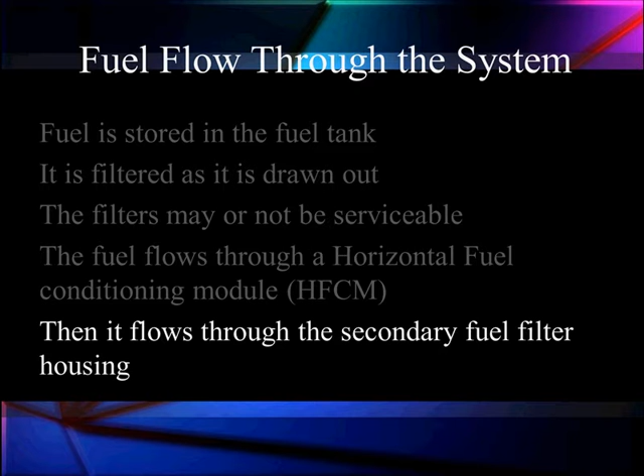It's going to pick up at the tank where the fuel is stored. Now the filters in the tank may or may not be serviceable depending on which version and vintage you have. Flow from there through the horizontal fuel conditioning module, which is going to give us our water separation and our first major filtering. Then it flows onto the secondary fuel filter housing. We're going to regulate the pressure, and then on to the injectors. So this is how we're going to get our low pressure fuel to the injectors.

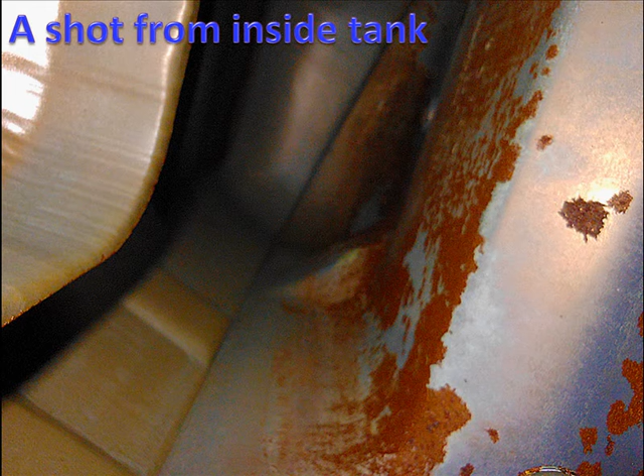Let's walk through some of the details. Well, first of all, these are vehicles that go hundreds of thousands of miles, so they get to have significant age on them. And sometimes we have rust like you have in the tank here. Sometimes it can be caused by using the wrong additives that attack the metals.

The fuel pressure has been changed on a lot of these vehicles. Early on it was 45 to 55 psi, but a lot of our technicians report they want to see the improved fuel pressure released by a new fuel pressure regulator spring, which will raise it to 60, and some say 70 psi. They like this because it gives them more reliable fuel delivery. We'll talk more about that in detail.

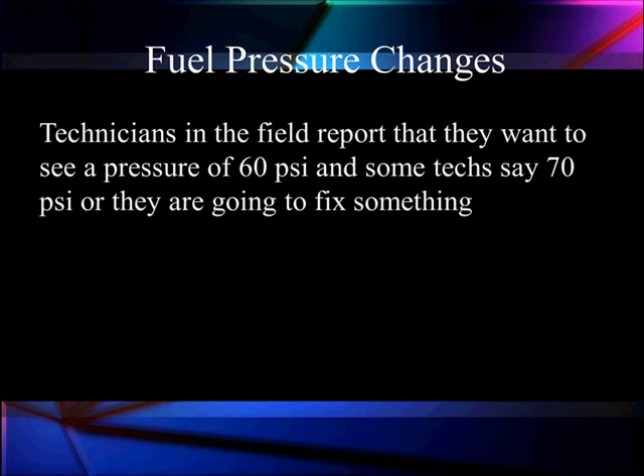Ford has released an updated fuel pressure kit with a blue spring. We'll see more about that in a little while. But I want to tell you, don't be confused if you hear people say they want to see 60 psi fuel pressure. Other people say they're willing to see anything over 45.

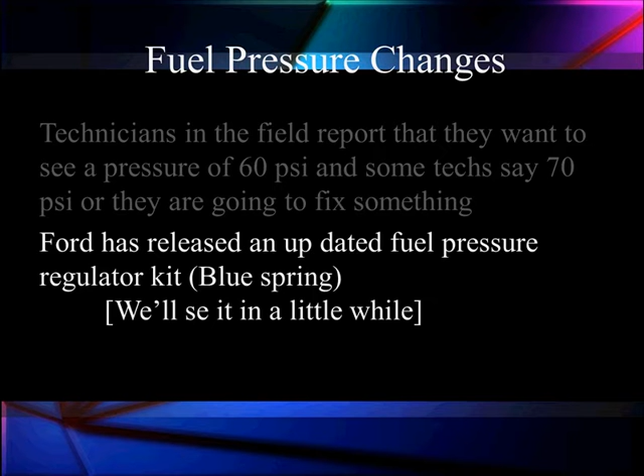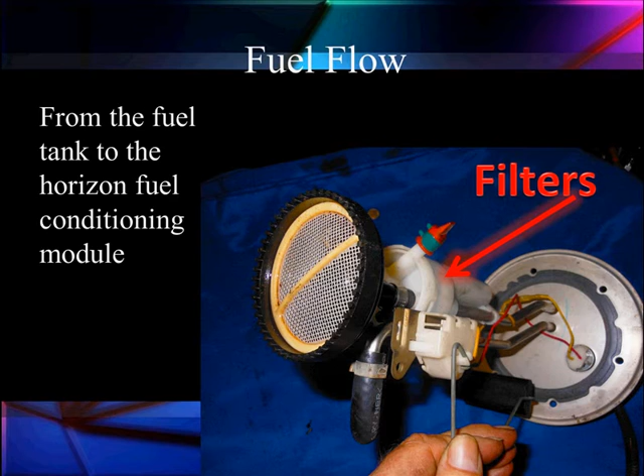There are different specifications. Fuel flow is going to leave our tank coming through these filters here to take out the preliminary large sediment that collects in the tank. Now these may or may not be serviceable. Here's the ones we use. They're very small. You can see the big chunks of rust we got out of that dirty fuel tank.

It goes into the horizontal fuel conditioning module. Conditioning meaning it's going to warm the fuel, it's going to filter the fuel, and it's going to separate the water. Three functions of the horizontal fuel conditioning module: warm the fuel up, separate it from the water, and filtering.

From here, we're going to send the excess cool fuel. We're going to recirculate it till it gets warm. When we finally get it warm, it begins to recirculate after 50 degrees Fahrenheit. We will send it back to the tank to warm up everything. This is done preliminarily to reduce the amount of waxing and cold filter problems running to.

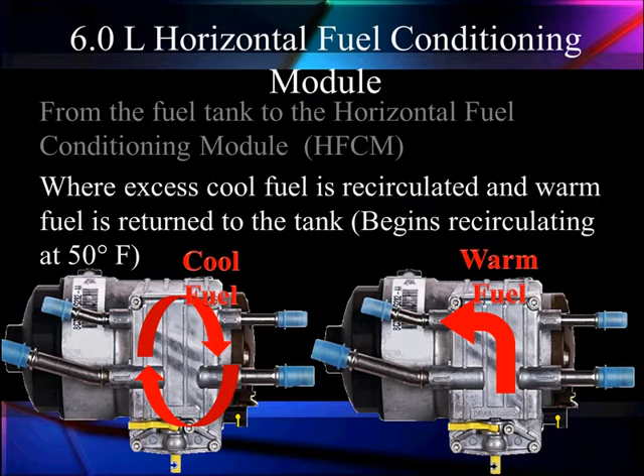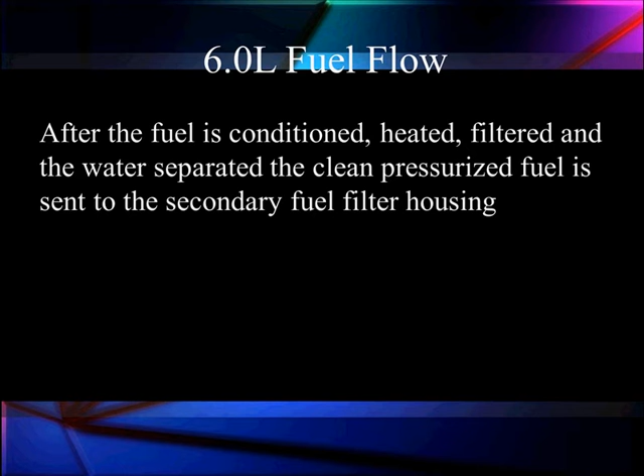So this blue line leading out to the right goes to our secondary filter housing. We're going to talk a lot about that secondary filter housing as we go through this program. After it's conditioned, heated, filtered, water separated, the clean, pressurized fuel is sent to the secondary fuel housing.

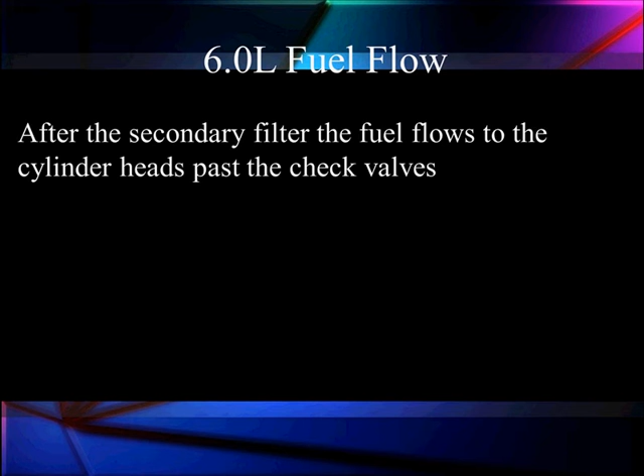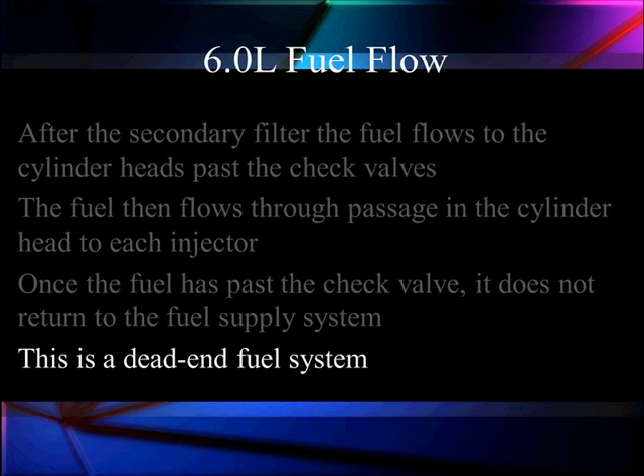After the secondary fuel filter, fuel flows to the cylinder heads past some check valves because it's a dead-end system. As the fuel flows to the passages in each of the cylinder heads to the injectors. Once the fuel has past the check valve, it does not return to the fuel supply system. This is why we call it a dead-end system.

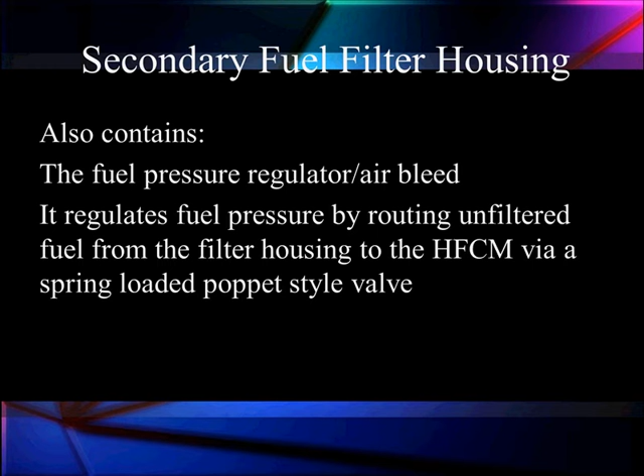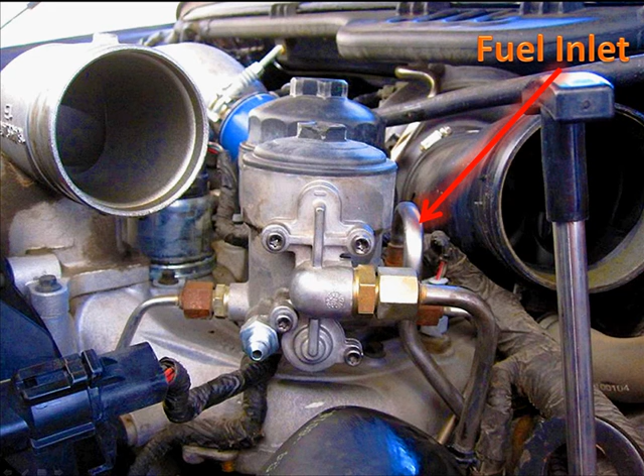Secondary fuel filter housing contains a fuel pressure regulator and air bleed. It regulates the pressure by routing unfiltered fuel from the filter housing back to the horizontal fuel conditioning module via a spring-loaded poppet valve. Here on the right, with the red circle, is our secondary fuel filter. After we leave the horizontal fuel conditioning module, we come to this line here, the fuel inlet, coming into our secondary fuel filter. We're looking at the end view of it right now.

This is our filter return after our pressure regulator, sending it back to the horizontal fuel conditioning module. To the left here indicates it's going to the right head from the driver's perspective, and this is going to the left head.

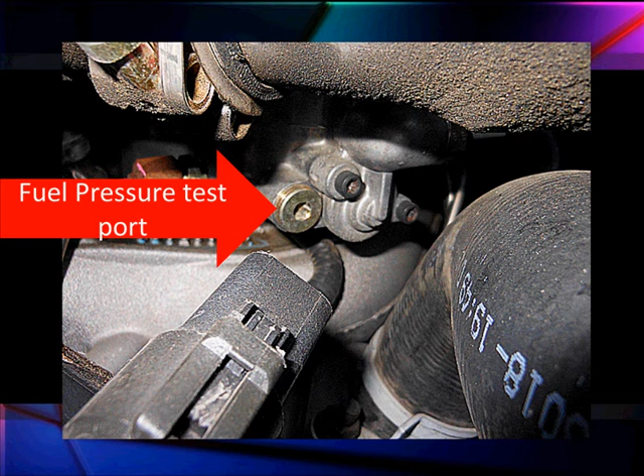This is our fuel pressure test port, located right by our fuel pressure regulator. We're going to talk about that fuel pressure regulator.

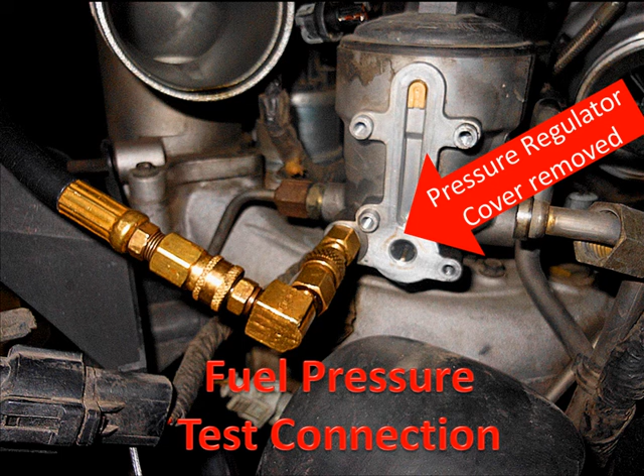This port is what it looks like when we remove it. You can install an adapter. We've removed the cover here, and we'll show you what's inside. We've had technicians like Glenn Young down in Houston make his own test arrangement with a special adapter for fuel pressure. It makes it much easier, particularly on things like an E-van.

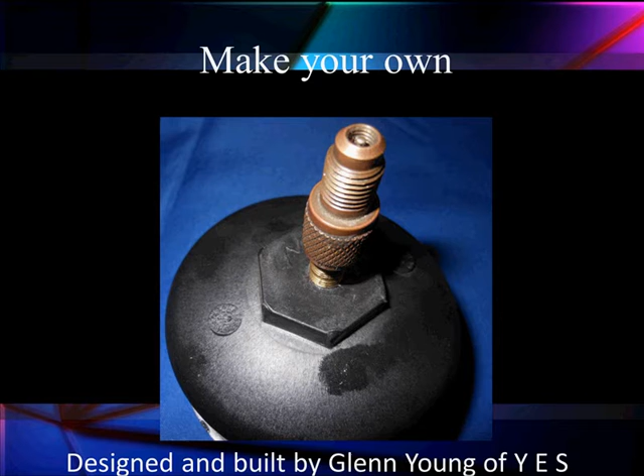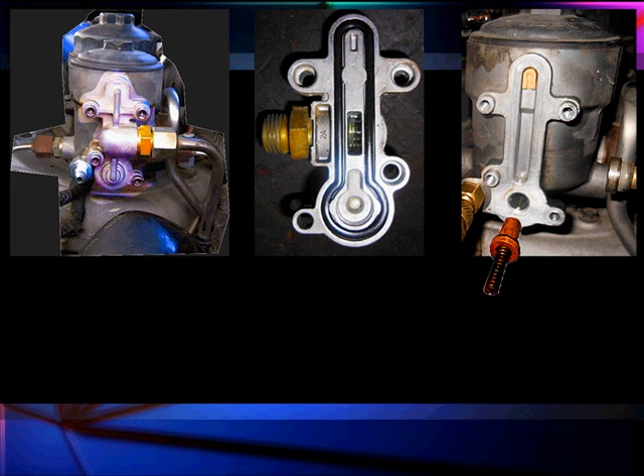This is our pressure regulator. Here's where it's located, and this is what it looks like with the cover taken off. Make sure the O-ring's in good shape. This poppet valve is going to open to allow pressure to come out. That particular poppet valve happens to be from a 7.3, but it doesn't matter. Here's a close-up of the spring and the poppet valve.

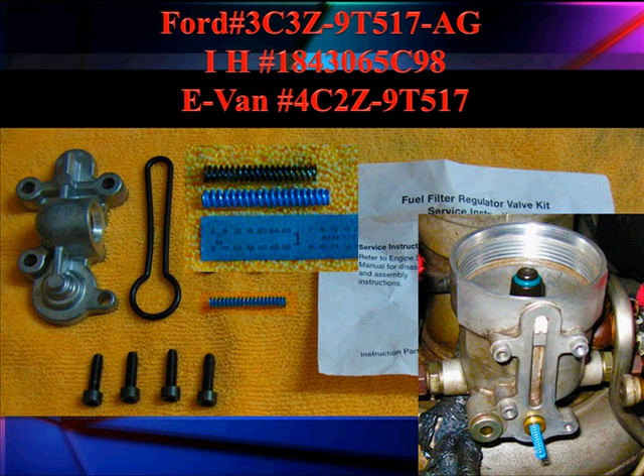Ford and International have released updated versions. Notice the blue spring is much larger than the older spring. This gives us increased fuel pressure. There's the Ford part number, the International part number, and a different part number for the E-vans. This raises our fuel pressure to over 60 pounds per square inch instead of 45 to 55, giving us more room for fuel delivery. We'll talk about the importance of that later on.

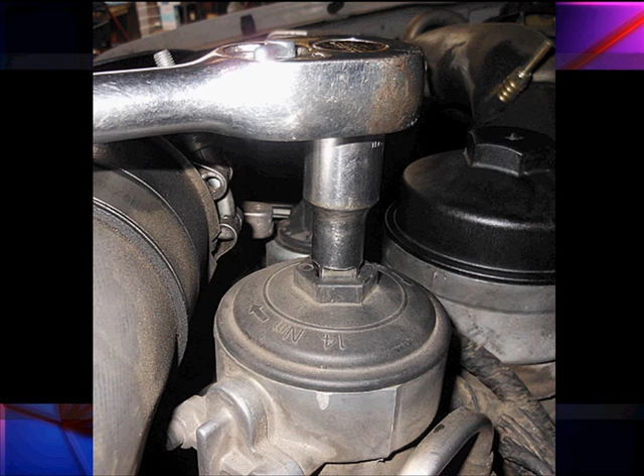We talk about the injectors. Here's the top of our secondary fuel filter. It's got a nice square drive, and most people think you're going to take a square drive and loosen it to take the filter out. Well, not necessarily. What's better is to take a socket and remove it.

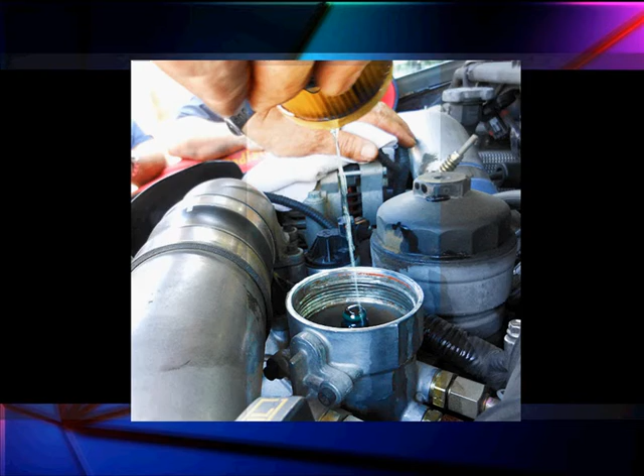The square drive will simply wallow out and cause a problem. So take the filter out, drain it all out, and make sure we have a good clean filter. If we don't have clean material coming in, go backwards through the system and find out why you've got contamination. Coming in here is our inlet fuel, going around and returning to the horizontal fuel conditioning module. This is unfiltered, so dirt, contamination, and water send us back to the horizontal fuel conditioning module and the fuel tank.

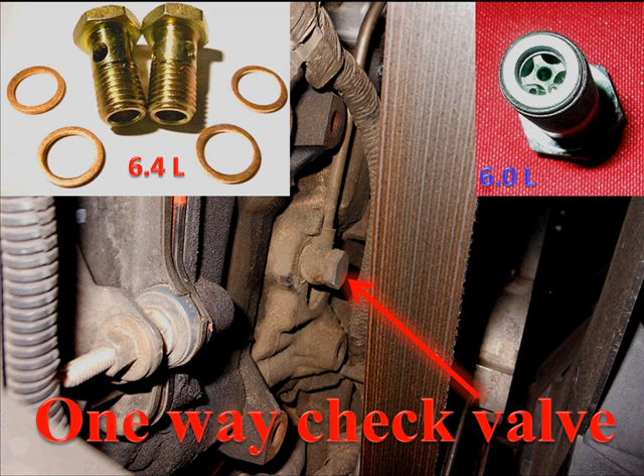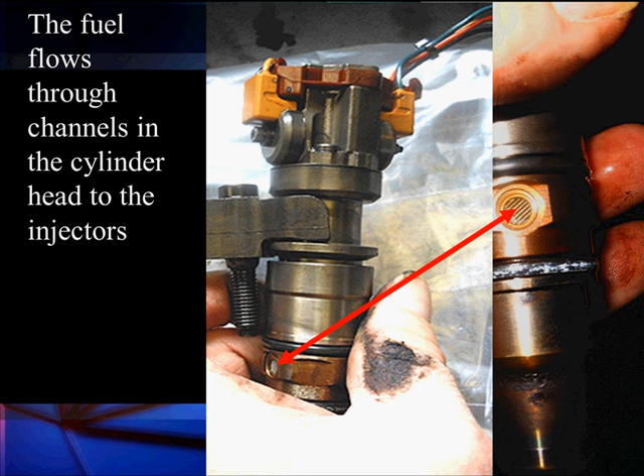Once we have this done, there's our pressure regulator. We're going to send this pressure off to our one-way check valve mounted on the head. On each head we have a check valve. Notice in the upper right, this is a check valve - once we put pressure in, we don't allow it to come back out. The 6.4 has a very similar looking bolt-in, but that's not a check valve, it simply passes through. Once we get the fuel, it flows into the channels inside the heads to each of the injectors. This channel is sealed off by two O-rings you see on the injector itself.

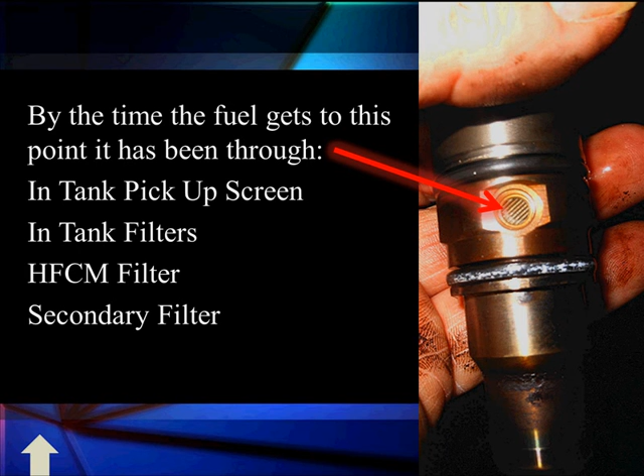So once we have it here, by the time it gets here, we've been through the in-tank pickup screen, the tank filters, and the horizontal fuel conditioning module, separating water and any more contamination. In the secondary fuel filter we've regulated, so right now we should have a steady, regulated supply of fuel. Next, we're going to go through each of these components and talk in detail about what's going on in each of them, so you have a complete understanding of what's happening.